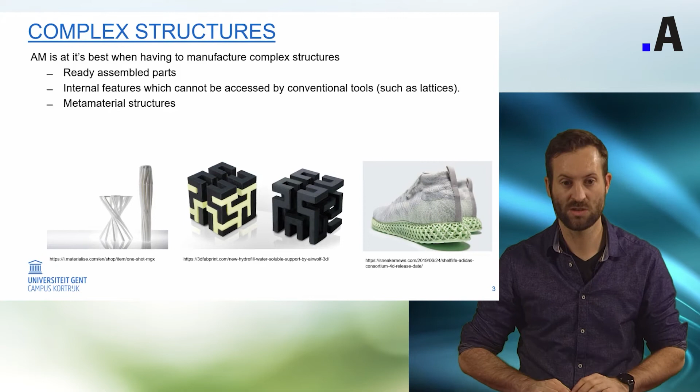So, for complex structures, when you would like to apply them with polymer additive manufacturing technologies, I would advise to either use FDM, which allows you to print multiple materials. So you can use one material which is soluble in water, or a jetted polymer technology, for example polyjet, where the support can easily be removed using high pressured water, for example.

Of course, the powder-based technologies like selective laser sintering, there the loose powder just supports the overhangs and you can just blow it away with pressurized air, or SLA technology, so photopolymers which are cured with a laser. There I do have to say that it's mainly the supports on the outside of the parts which are easily removed. Internal support structures are a little bit more complex.

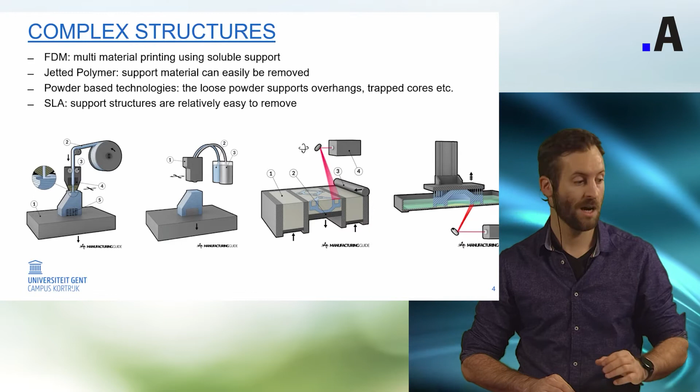So now I would like to say a little bit more about long-lasting product design and additive manufacturing, as we feel that both go hand in hand. So long-lasting product design, this is something where we have to strive for globally. We have to move away from a consumer society where we discard products very easily.

And then on the other hand we have design for additive manufacturing. When you look at the guidelines of both domains, you will see that there is quite some overlap.

For example, the ability to easily repair parts is very much facilitated by design for additive manufacturing, since we can produce just in time without a lot of waste. The adaptability and upgrading comes also at a very low cost when using additive manufacturing, and so on.

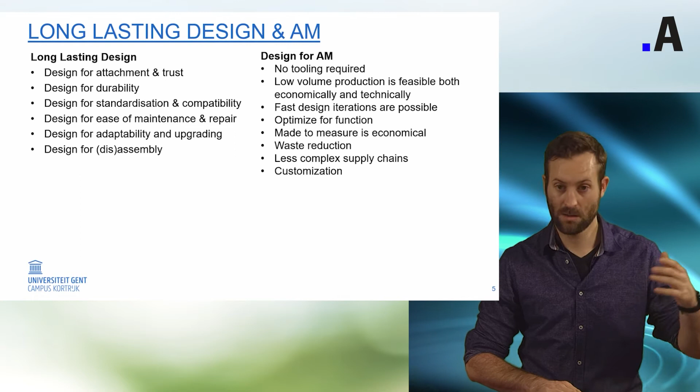So now we move over to the examples. First of all, I would like to say something more about the metamaterial structures. So metamaterial structures are very unique structures where we design materials which behave differently than when you would normally find them in their natural behavior.

Take, for example, the door handle you see. This is built up out of a flexible filament. So normally flexible filament stretches and then returns to its original shape. In this example by the HPI in Potsdam, they designed special structures which can compress and stretch in an engineered way.

By doing so, they redesigned a complex assembly of many mechanical parts used for a door handle into one 3D printed part, which functions very well, as you will see.

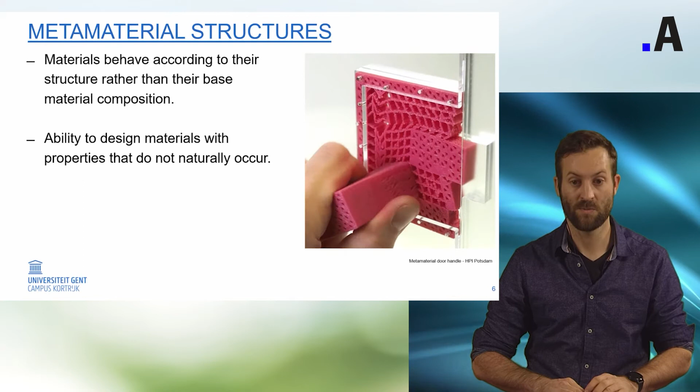And if something breaks, you can just recycle the plastic and print a new part.

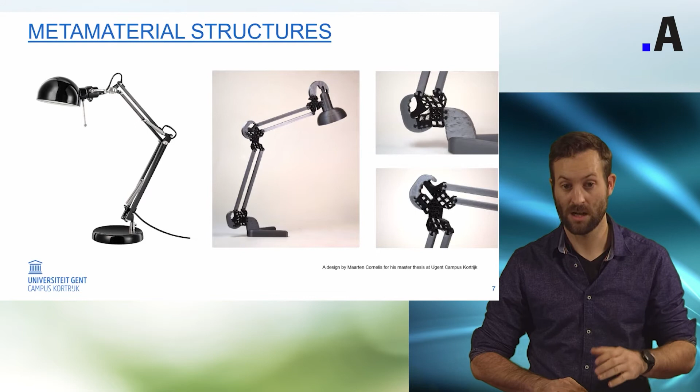A few other examples. Here you see an IKEA lamp, a topic which we tackled during a master thesis at the industrial design program of UGent. So we took an IKEA lamp, we analyzed all the forces in the lamp, and we tried to find ways to replace the mechanical joints by 3D printed parts. And this ended up functioning very well, although I have to point out that the side stiffness of the product is still open for improvement.

Another example is a drum pedal.

With my laser pointer, I am showing you the conventional drum pedal. Next to it, you see a similar drum pedal, but the chain, the rotation points, and a few other attachment points are replaced by one 3D printed part, where the hinges are replaced by metamaterial structures. This has a great advantage that the piece can be customized according to the drummer's personal preference, according to the feedback he or she desires from the drum pedal, and if something breaks, a spare part is very easily, very quickly made in a low-cost manner.

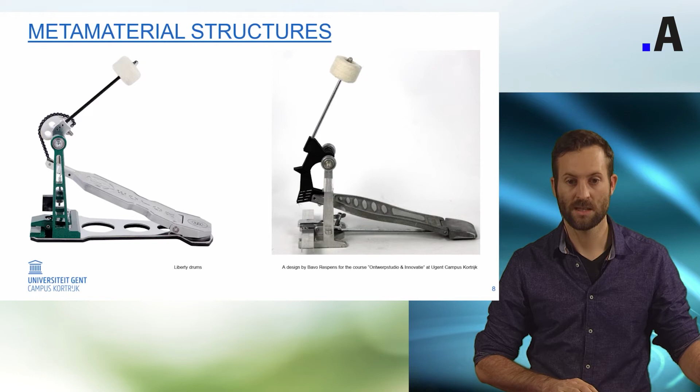Next, another inspiring example of the use of additive manufacturing we can find in customization. So just to start with, customization and personalization are two different things. It's a nuance. Nonetheless, personalization is very common with conventionally manufactured goods, where you have a predefined set of options where you can choose from, for example, different colors, simple parts which you can change and compose a new product. Think of shoes which can be customized online.

Customization, on the other hand, goes beyond. There you can really tune a product to your very own preference. So we make one-of-a-kind products which are fully adapted to your preference in terms of aesthetics or ergonomical, anthropometric preferences. Think about custom medical aids and so on.

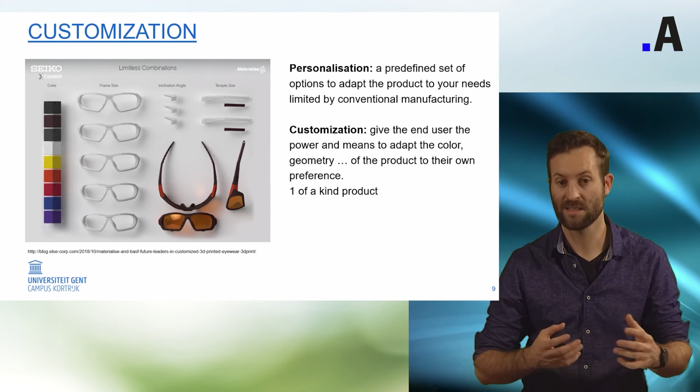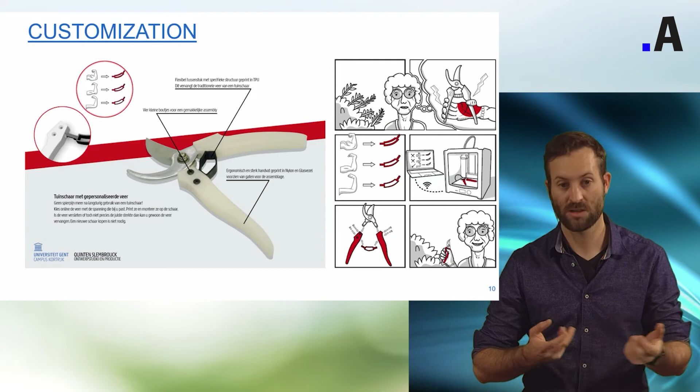With a series of 3D printed flexible springs, which can be assembled into a 3D printed handle. So both the spring and the handle can be fully customized according to the preference of the user, be it the hands of people with arthritis, kids who want to help their parents out in the garden and who might not have a lot of power to cut the branches, whatever.

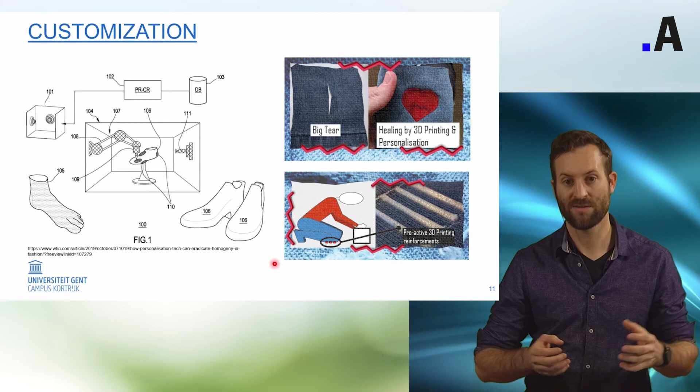Next up is an evolution we see in integrating electronics into products, and that's also where additive manufacturing can be very valuable, especially when we look at multi-material printing systems. There you use one nozzle with a conductive filament, or with an ink which is filled with silver particles, and you print it on top of a substrate. That way you can create sensors or switches. Think, for example, in situations where the electronic product might come in contact with fluids and you don't want any fluids penetrating the products. That's where integrated electronics can be very useful.

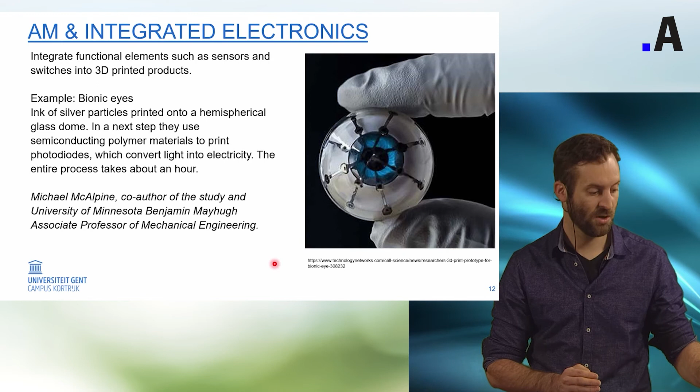So those are things that normally, if you would have to do that the conventional way, the assembly would be way more complex. You would need a lot more parts, and you might have to source from abroad. Now you can integrate everything in one product, and on top of that it's waterproof, it's safe, for example, for outdoor applications.

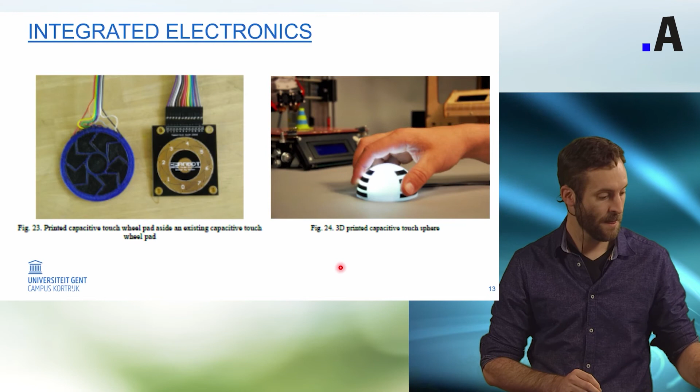We believe 3D printing can be very useful in terms of spare parts. Normally when you need spare parts, I think, for example, when your coffee machine breaks down, very few people think of repairing consumer products because the spare parts are simply too expensive. This is due to the fact that spare parts have to be stocked and shipped, making it a very expensive operation. If we were to make a transition to 3D printed spare parts, we can just produce them wherever we need them, very close to the end consumer.

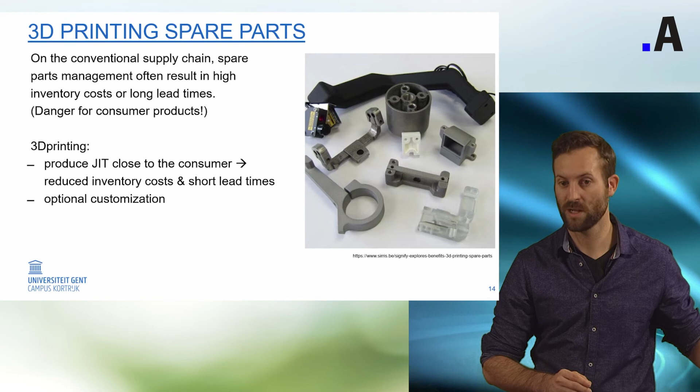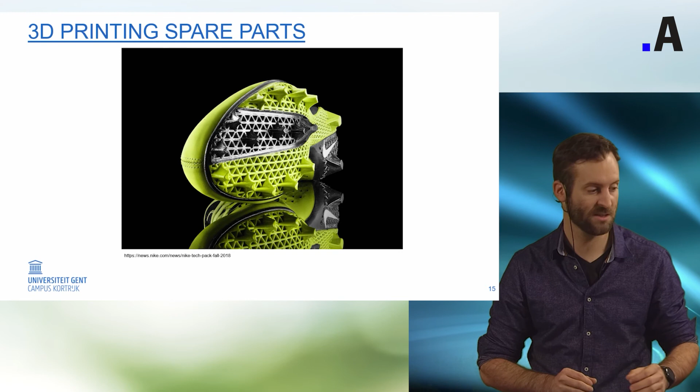Another thing is that 3D printing can be used for tooling. Very often we look at additive manufacturing, 3D printing, as a way to make end products, but in some cases 3D printing just won't do because the process takes too long, the materials are not available, or we need a certain volume or batch to be produced, which is just not economically viable with additive manufacturing. In that case, we can also produce the tooling.

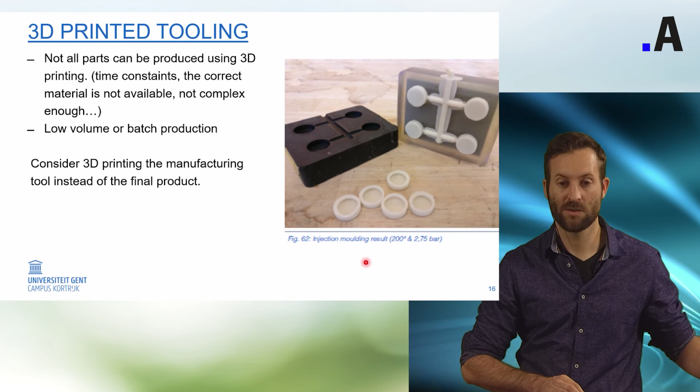Tooling for injection molding, as you can see on the image here. These are SLA printed molds. We did this on a small desktop SLA printer, and then injected thermoplastic urethane into the cavities with a small benchtop injection molder. Next, you see another SLA printed injection mold.

This was part of a robot called Ono, an open source robot made for small children with autism. The eyes of the robot module were normally 3D printed, but this took quite a long time, and the result was not always satisfying, so we decided to give it a go and 3D print the molds and injection mold the eyes in polypropylene. A polypropylene eye takes about 30 seconds to injection mold, and then we have to let it cool, but that's still a lot faster than when we would print it, and the finish is a lot better. So this is the best of both worlds combined.

Also, you could use a 3D printed mold to cast resins in, for example silicones or urethanes, or to vacuum form something in. You heat a sheet of plastic and then vacuum form it over your mold. For example, if you would try to make samples of packaging, or molds to cast chocolate or whatever.

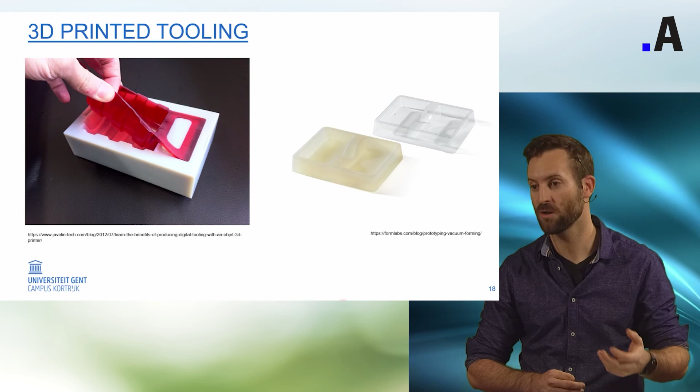Next I would like to explain something more about modeling, so computer modeling and additive manufacturing. It is our opinion that with conventional CAD modeling you can already do a lot when it comes to additive manufacturing, 3D printing, but you really get the most out of the technology, as I explained earlier, when you make very complex shapes, and that is where CAD modeling software like Rhino and Grasshopper, which is a visual programming language, comes into play.

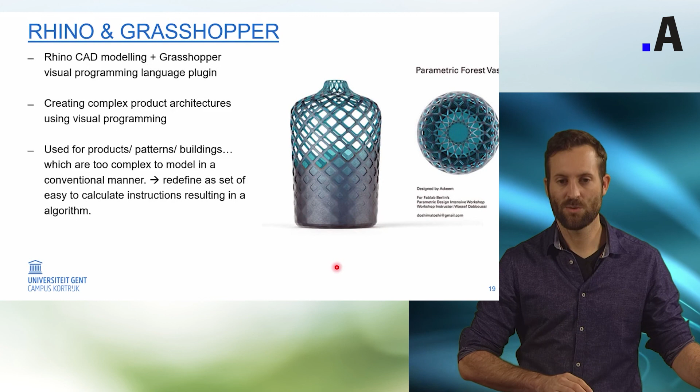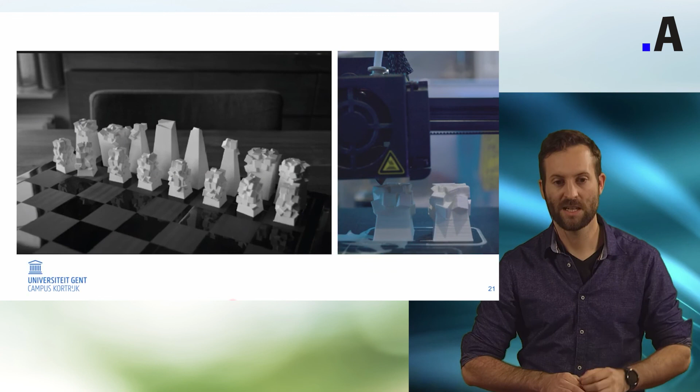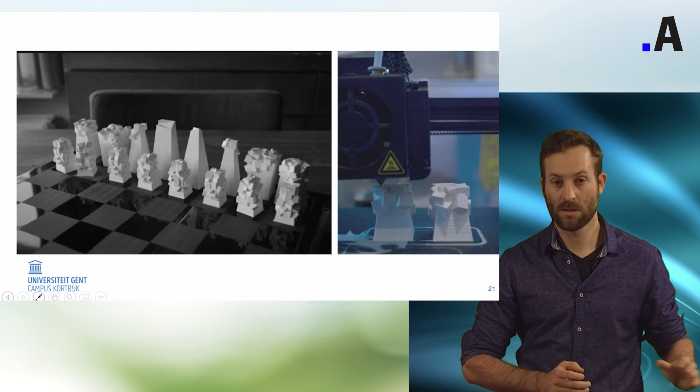With this, I actually want to conclude my story. I hope you had some interesting new ideas when it comes to additive manufacturing, and we look forward to hearing from you in case you would have questions.